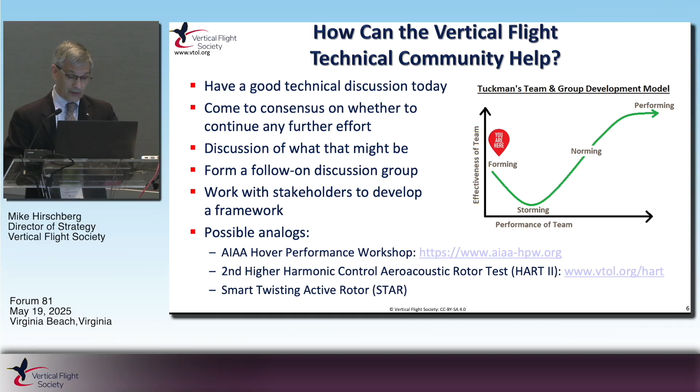So if so, then maybe it's forming a follow-on discussion group, working with stakeholders. I mentioned some of the government agencies. There's some different potential go-bys or analogs. There's a hover prediction workshop with the Army and the High Performance Computing Center. There's HART, STAR. Actually, STAR is having a meeting right now.

And then specifically, I mentioned these web pages, this Downwash landing page, Downwash library. We have a hover community discussion group, right? So we could start one on downwash and outwash if we want to have a discussion on that, and then look at emulating other types of working groups that they've done in the past.

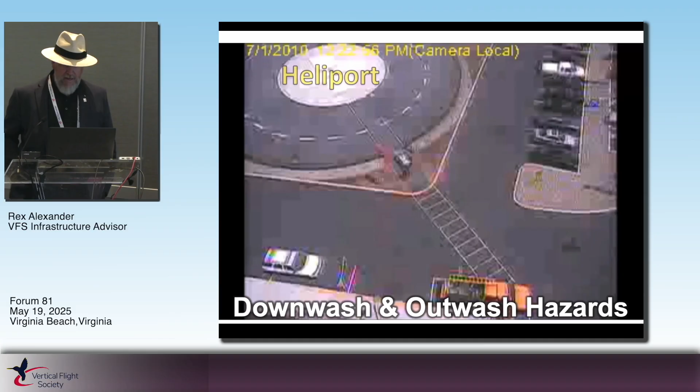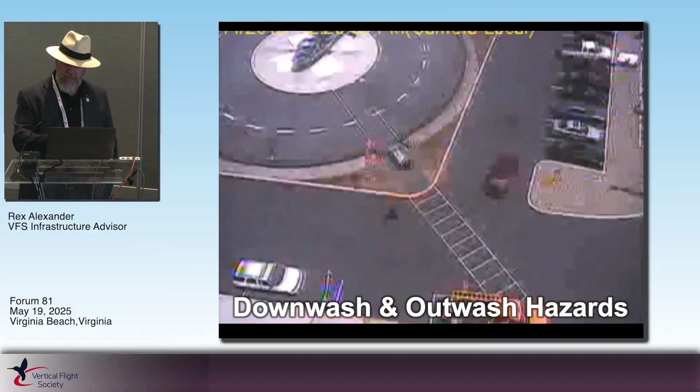I luckily dodged it. Heliport in the middle, up in the right-hand corner, you see the white truck and the people walking by. The tailgate's down with a tonneau cover, downwash, $250,000 later and 9 stitches. And this is just fun to watch. Having been in Army aviation for 6 years and had the opportunity to blow over 3 porta potties myself, only with a Bell 206, I was fairly happy with this.

I think one of the key elements we look at in quantifying downwash and outwash is the fact that the FAA in Engineering Brief 105 Alpha drew a line in the sand for the first time ever and quantified what the caution area is, basing that on 34.5 miles per hour. Now, the problem is I don't have any tools to actually ascertain what each aircraft in the inventory creates during normal operations into and out of a heliport, let alone eVTOLs coming into and out of vertiports. But we now have a number.

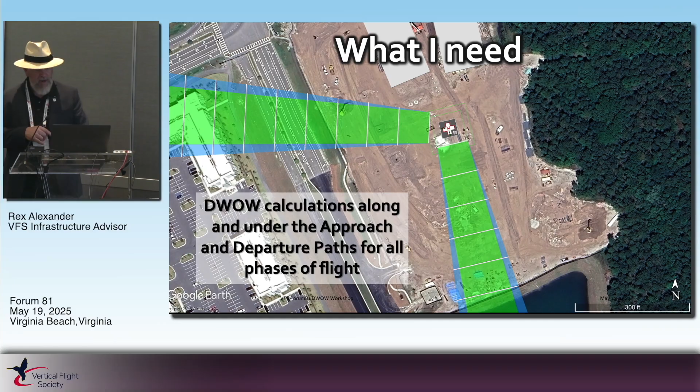I need something that calculates that downwash as it's coming down from the aircraft after it transitions from effective transitional lift below and above. Right now I have a model that's right over the top of the heliport. I need something that I can calculate the flight path. One of the missing ingredients we have in the helicopter world is we don't have a good parameter I can point to that defines what a stabilized approach is for a helicopter.

In the airplane world, there's a lot of material that says this is a stabilized approach. A really good friend of mine from the FAA and I brought this topic up about a year ago. It was amazing how much pushback we got from the helicopter industry when we broached the subject of, hey, we should define what a stabilized approach is. No one wanted to, which I found really interesting.

So based on normal mathematics and physics formulas, I created a spreadsheet where we can pick and choose different aircraft for a stabilized approach. And I can calculate what the average and the peak of the downwash might be at a stabilized hover. Now, the thing is, I can't add the formula that says, okay, the pilot is on approach, he's decelerating, he's adding power, or she's adding power. They're arresting the descent rate, they're adding more power. Well, that's not a stabilized hover.

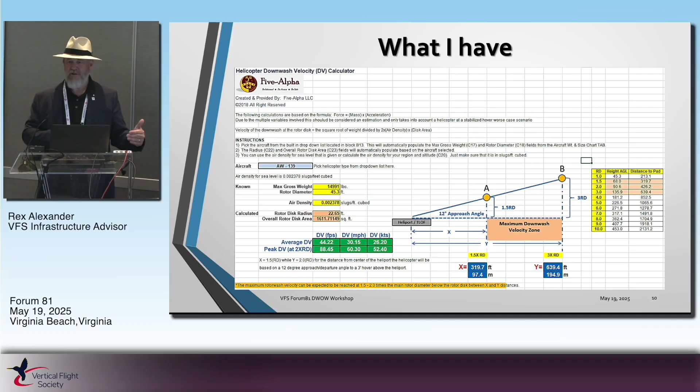That downwash vector and quantity is going to be much higher than a stabilized approach or stabilized hover, whether it's in ground effect or out of ground effect. I don't have the formula to actually figure that out. What I want is what we see in today's research when it comes to noise. We have contour lines that show me where the noise contour is for decibel readings and how those propagate out and decrease. What I want is the exact same thing for downwash.

This is a 34.5 mile an hour ring. Anything inside of that is my caution area. We know it's not perfectly circular at all, especially on that approach and departure path. That's what I want. Now, how do we apply that? I look at the risk analysis piece when we look at downwash and outwash. This is straight out of ICAO's safety management system.

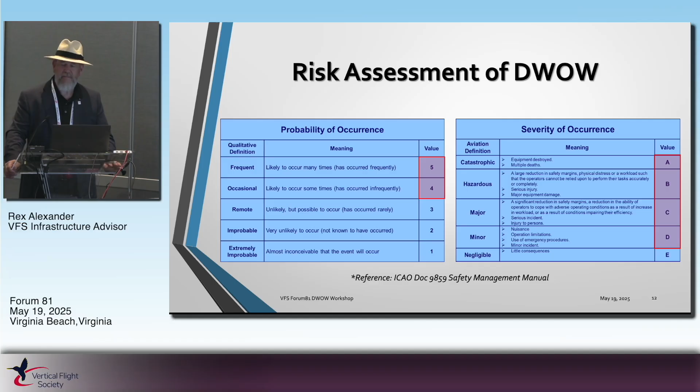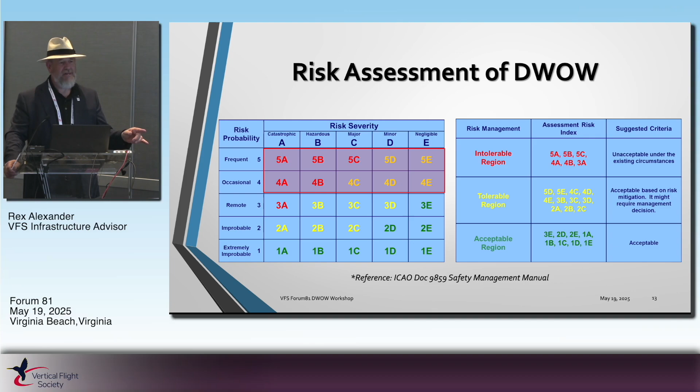Frequent, likely to occur many times, has occurred frequently, yes. Occasional, likely to occur sometimes, has occurred infrequently. Anything we talk about with downwash and outwash is going to be a 5 or a 4. Then we look at the severity side. If you look at 5 and 4, A, B, and C, basically intolerable region, but we allow it to go on constantly. So from a risk analysis standpoint, having data to plug into my safety management system based on the locations of my landing areas and the aircraft that are operating there would be huge on the safety side of the house.

Now, our good friends at the FAA, I've had this conversation, Mike had pointed to it. We're talking about the fact that we have no good data. There is no reporting system on how to report or who to report a downwash or outwash incident to, whether it's injury or damage. Now, as a consultant that works in this space, I will tell you I've been hired several times over the last 30 years to represent individuals in lawsuits. Most of those have been settled out of court, so they're not discoverable by the public. And neither the FAA nor the NTSB has ever received a report from any of them.

So ASIAS may be a good conduit for us to actually effect a reporting system, just like we do for bird strikes today, laser strikes, or drone incursions. Gathering good solid data is going to be huge to be able to actually figure out what the problem is.

Again, lots of variables. We have an opportunity, I think, in talking with Richard Brown and Mike Price several times now, and we had the Downwash online discussion a couple of weeks ago. If you haven't seen that, it is online on YouTube. Please go look at it. I see a lot of opportunities for improvements in this space for us as traditional helicopter operators, but also in the future as eVTOL operators.

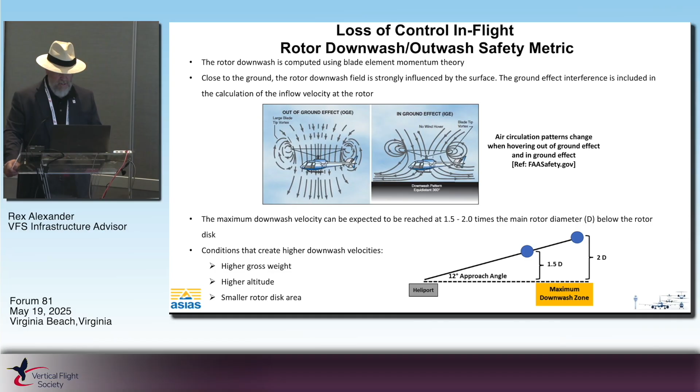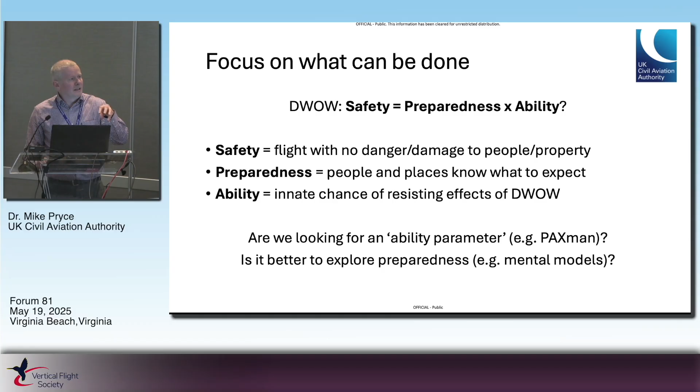But I think one of the things we need to really understand is what's the end point you want to get to. And for the UK CAA, it's very much that third-party safety is the thing that no regulator can turn their back on. So a lot of the focus and discussion is on what the innovators are doing, and we're an enabling regulator. We want to enable those innovators, and it's by bringing everybody to that final endpoint and understanding where does safety really lie and how do we prepare for it, that I think it could be really useful to have a discussion.

Mike Hirschberg's talked about in the past a thing people call the wheel of misfortune for vertical takeoff aircraft, where lots of the programs fail. And for eVTOL, is there a wheel of fortune? Is it the case that now we have the technology that can make these aircraft work? We did some modeling with Richard Brown, a publication called, not very snappy names, I know, CAP 2576. Again, that's available free online.

But one of the products that came out of that was, okay, what markings do you have on the ground? Do you have a classic TLOF FATO helicopter marking? Or if you've got eVTOLs producing outwash spikes, do you have different shapes? My children, if you go to their school sports halls, what you find is they have painted lines for all the different sports they may play in different colours. Is that something we want to have? Do we want a really confusing area to land in? Do we have something that's dynamically generated? Virtual reality, is that how you do it? There's all sorts of possibilities.

But how do we future-proof whatever decisions we make now by understanding what DWOW, as we're calling it, may actually produce in the future, I think is a really important area. We don't want to box ourselves in and limit innovators by coming up with something that works for the Mark 1 version of an aircraft, but not the Mark 5 that comes along in a number of years' time.

Operations, I work in flight operations at the CAA, not the innovation team. And we're looking at this very much from that perspective of, okay, let's imagine these things in daily service. How do we make sure that happens in a safe way? How do you get to the 10 to the -9 or 10 to the -12, whatever number it is that you come up with that you want your sector to aspire to and achieve?

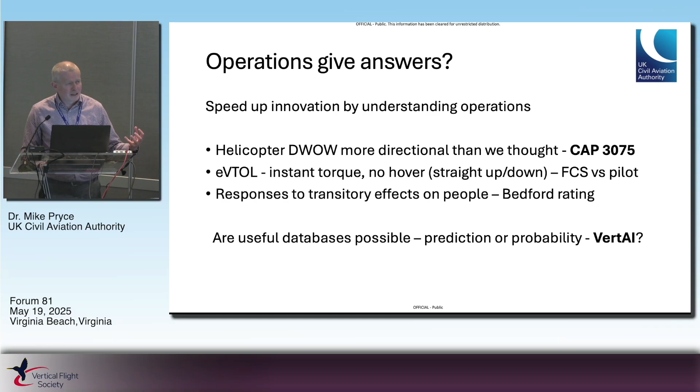But it would be really good to end up with a usable database that can be shared openly, that we know is based on validated data, and actually models also are validated against that data. But if you ask me a simple question, which is, what's the one thing we can do? And this is maybe a dumb idea coming out of my dumb questions: I think perhaps we need to rename downwash and outwash.

Most people I speak to who aren't in aviation, they say, what do you do? And I say this, and they're kind of like, what's that? What are you talking about? In the airliner area, jet blast kind of sounds dangerous. If we want people to be cautious around helicopters and eVTOLs and to watch out for outwash, I mean, outwash sounds like it's something to do with laundry for a lot of people. I think we should come up with a different name. And again, it's one of the things to discuss today.

Here are some suggestions. These just popped out of my head almost randomly. Rotor blast, but is that just a one-off event? Actually, outwash feels like waves hitting you. Maybe vortex waves because it's produced by vortices. Prop gusts. You know, eVTOLs don't usually have rotors; they have propellers. I know this is a subject Mike has written about.

But really, the main thing is, I think the objective of all this is to let people who are around these aircraft or operating these aircraft have some sort of mental model that allows them to deal with the dangers that are presented. So actually those dangers never appear.

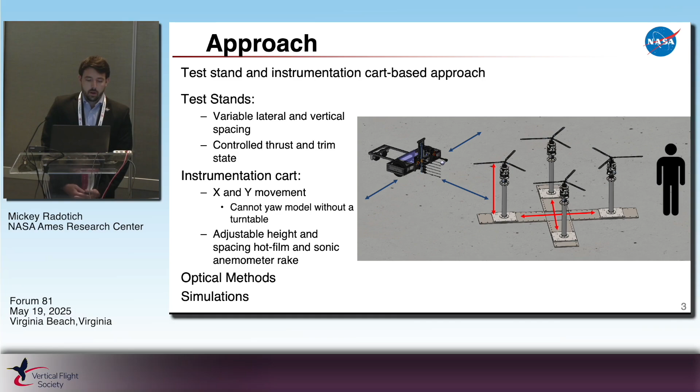So being able to space them longitudinally and laterally and vertically separate from each other to model any different configuration. And then having our instrumentation really able to move and probe anywhere in the radial or azimuthal field of the rotor. We're also looking into some optical methods that I'll talk about in a second, and running some of our own simulations as well.

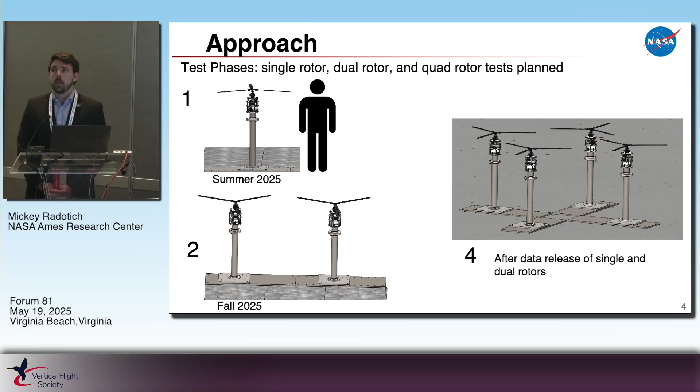So our current testing plan, very soon in this summer, 2025, basically as soon as I get back from here, we'll start testing our single rotor model. And we'll be moving on to a dual rotor, release that data, and then the plan is to move into a 4-rotor configuration. So real quick, just on how we are developing our points of interest here.

We're looking at NASA's RVLT reference vehicles, a family of vehicles that represent different configurations representative of urban air mobility. And so taking the different hub-to-hub distance and Z separation, vertical separation between the rotors, you can see that a lot of things fall into this bounding box of 2 to 3 radii rotor separation and 0 to 0.4, 0.5 radii vertical separation. So that's where we're looking to start.

Now the test stands that we're using here are pretty simple. 5-foot diameter, being able to measure thrust and moment with collective and cyclic control. The big thing about them, though, is that they're height adjustable from 2 feet to 10 feet off the ground. So we can get down to 0.4 diameters off the ground, all the way up to 10 feet. So we can change them individually.

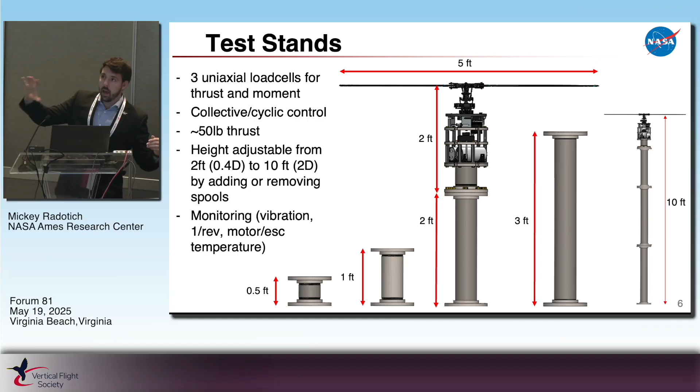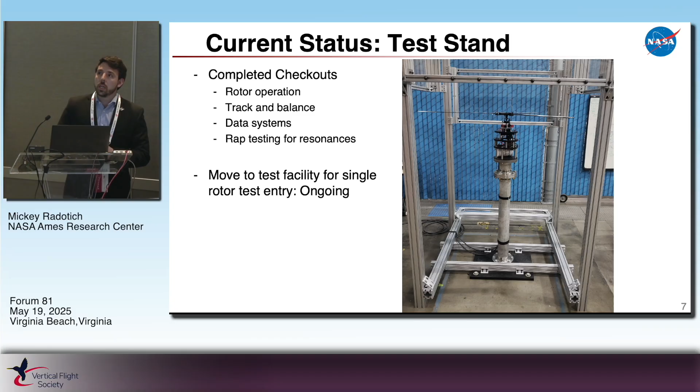So you can look at different rotor heights configuration on the same vehicle, as well as that vehicle at different distances off the ground and how your outwash is changing there. So this test stand exists, and checkouts on operation, track and balance, data system testing, and making sure we don't shake apart due to ground resonance, sorry. And we're moving out to our test facility that I'll show in a second.

So then the other big part of this is the instrumentation. So we have a mobile instrumentation cart, and it has a hot film rake that again can be moved into any point radially or azimuthally around this rotor system. So a big part of that is it's a fully independent system, so it doesn't depend on this specific rotor setup to operate. You could take it and put it next to any other hover test stand or full flying hovering vehicles.

It is completely independent, so it is something that we'd like to use for a variety of different things in the future. And a little bit about what we're doing and why in terms of instrumentation is we're using a rake of hot films. And so the motivation there is that we can get really fine spatial resolution. So we can get down to 1/2 inch off the ground and space those hot films about 3/4 of an inch apart to get kind of a dense field of our measurements. And it can also take very high rate data.

So we talk about outwash being chaotic and very time dependent. And so we're not just looking at averages, we're looking at the frequencies that are coming off of that and that high speed data. So sampling at 10 kilohertz, for example, on these hot films. We also have a sonic anemometer on here. And again, for reference, that's about 5 inches diameter on the sphere, and that's a fairly small sonic anemometer, so you couldn't get that kind of spatial resolution. Also, the sampling rates are typically a lot slower at around 10 hertz.

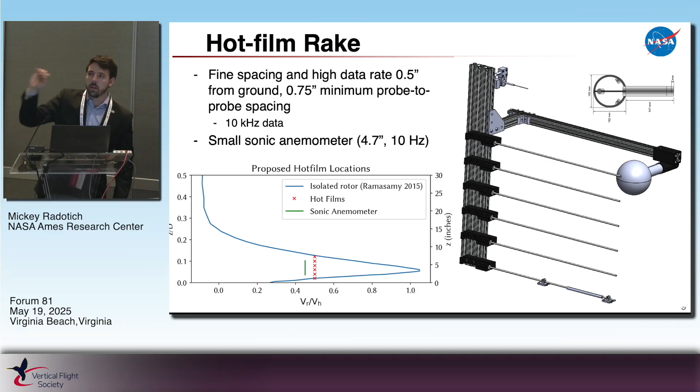That chart there on the bottom left kind of highlights why we are motivated to do that. So if you look at normalized velocities and heights off the ground, you can see that sharp knee bend where that peak velocity is. It can be a pretty small range, and so we want to really capture that distribution there with our hot films.

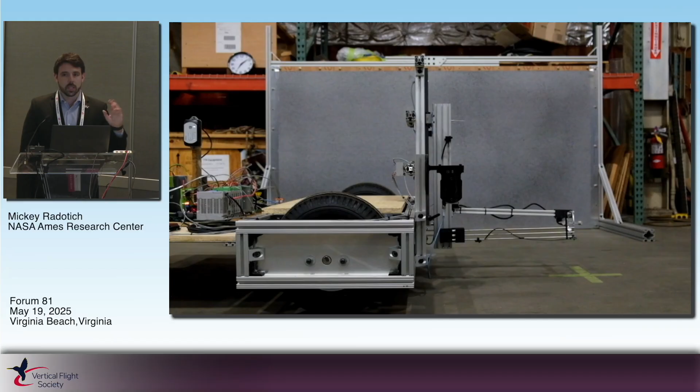So just so that it's real, this is a quick demo we had lying around of this cart operating. So you can actuate the rake vertically and also set the spacing of each hot film relative to each other, drive the cart around, and set the hot films back down where they need to be. So we'll be taking many data points around our rotor systems.

The next thing I want to talk about is an optical method that we have kind of in development with our optical folks over at Ames. And that is helium seeded background oriented Schlieren velocimetry. And so the general idea here, without getting too far into the weeds, is you can inject helium into the flow field, and with Schlieren imaging, you can see the difference in refractive index that's caused by the different density of your gases. And so you can see those structures kind of moving through the flow field, and that's just fan forced flow.

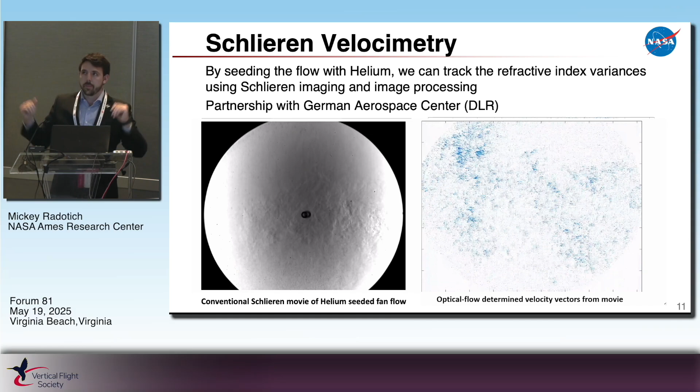And then with a camera with an LED and retroreflective background with a randomized speckle pattern on it, you can capture that difference in refractive index and then correlate that with the background and get your velocities. So again, this is a method that is in development from researchers at Ames and our partners at the DLR in Germany. And so they're developing this new method, and we are hoping to see what kind of good results we can get out of it. We're also doing our own simulations.

So, primarily looking at CFD and comprehensive analysis. So we're using OVERFLOW in fully blade resolved, as well as kind of a new feature in OVERFLOW, an actuator line model that models the rotor as an actuator line and then calculates the rest of the flow field as it normally would. And that is just to save in computation costs. So we're looking at the effectiveness of that.

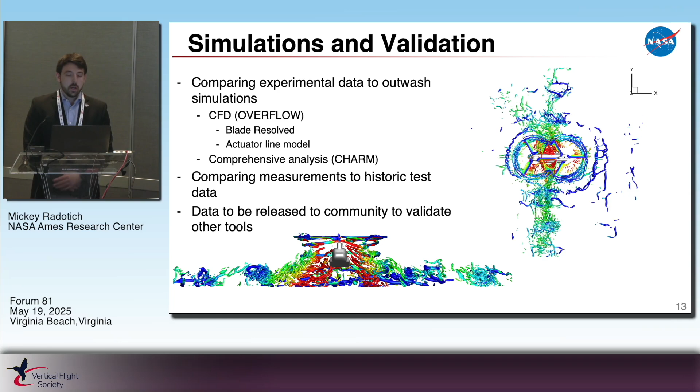And then of course, comprehensive analysis, the even more computationally efficient and fast methods there. So of course, we'll be comparing our measurements, particularly in the single and dual rotor setup, to historic test data. And we'll be releasing all of our data into the community for everybody here to validate your tools.

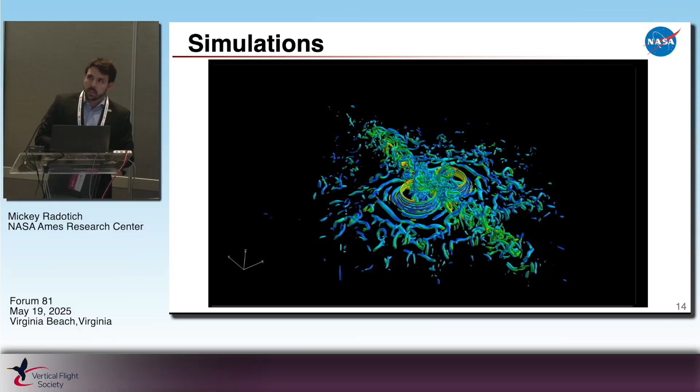Now, I just thought I'd show this up here. Again, this is what we're talking about with those jets that form kind of in the symmetry plane between these rotors. So you get much higher velocities where the outwash here is interacting.

And it's not just a parking lot, right? It has the infrastructure we need to run the test that we need to do. So it's a place that has a rich history of rotor testing, and we are going to continue that.

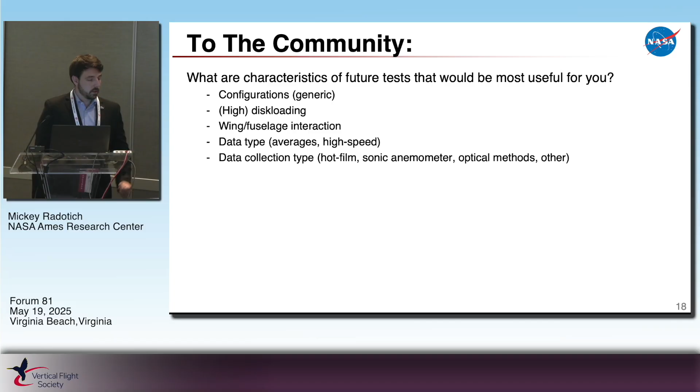So as far as the workshop, I know we don't have questions right now, but in the discussion and talking to me afterwards, we are looking for what the modeling community wants in terms of data and what you want to see from us, to help scope our future tests. So these types of detailed questions, we'll save either for after the presenters or offline.

But yes, I did have one. Sure. Whereas most multirotor configurations use more than two rotors, are you looking at that as well? Not in the current plans, but again, we're generating downwash and outwash, and it should be representative. All right, so now we're going to switch to our modeling and simulation companies.

Thanks, Mike, for having me. I expected a small meeting, so I'm kind of a little bit overwhelmed. You will see it also in my hastily stitched presentation. First of all, Mike, I was thinking the entire time, I tried to come up with a nice word for downwash and outwash in my native language, German, but I couldn't come up with anything less than 30 characters. So maybe English is a better one. So good luck with that. I will not be any help there.

But I followed your lead actually with my presentation, and will actually have more questions than answers in my presentation as well. I will, for the sake of quickness, go through this. We didn't get any guidance of what to show, so I did my best guess. I remembered that I'm actually a mechanic before I became an engineer. So I tried to look at everything a little bit from the practical side. Why are we doing stuff? That kind of thing. So first I would like to say we are ART, we're doing FLIGHTLAB and RCAS. I wanted to show from the toolmaker perspective how we experience the downwash and outwash discussion.

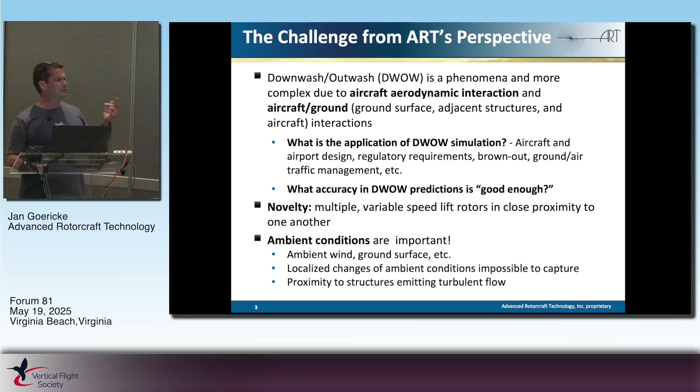And then you will find, of course, very quickly that ambient conditions do matter, right? There was a measurement of ambient wind. It's probably not good enough because you have probably a large area. There's a lot of different wind going on in different corners here. And we saw that in NASA Ames with the structures around it. There's a lot of stuff going on from the ambient that you have to catch as well in order to make sure that your predictions are correct. So just unleashing CFD might not be the one thing that we need to do here.

Just as a background, I thought we were only like 10 people here in the room. If you don't know us, our company has about 40 years experience in modeling and simulation. And as I mentioned, we have done it for helicopters before, and now seeing the new configurations coming around and looking into this again. And one of the other aspects that our tools are used for is to set up measurement systems. I'm old enough to remember that we used to measure first before we unleash CFD. Now we do it the other way around. We measure to make sure that CFD was correct.

And I feel a little bit of the art of measurement is lost. There are people that I could go to that would tell me where to put my sensor, which sensor would work, how to avoid obstructions of sensors. Just because you put it on a boom doesn't mean that you don't back pressure your sensor because of all the structure that's behind it. What is the secret sauce there? So I found out when I supported some of our customers on setting up a test campaign that we can use our tools to set up measurement systems, but it feels a little bit like reinventing the wheel. So to our community here, I would also like to have some good guidelines of how do we measure this consistently for different aircraft configurations as well.

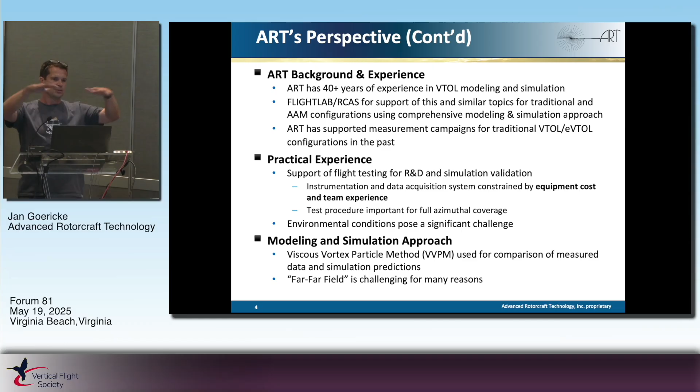And what I found out is that, of course, when I do a viscous vortex particle method, I can put virtual sensors wherever I want in a domain. But then in the real world, you can only afford 5 sensors. Where do you place them? Do you have a horizontal grid? Do you have a vertical rake? Do you have both? Can you afford both? What is the sampling rate? And all this nitty gritty that you have to then do with the time synchronization with your ambient data is really tricky. So a lot of guidance, and I think NASA is exactly on this path. I was really excited to hear that.

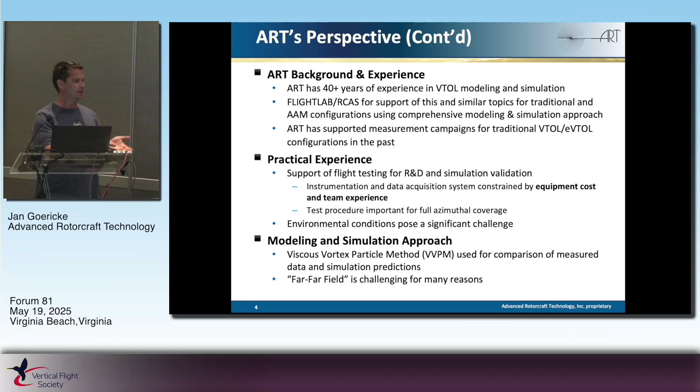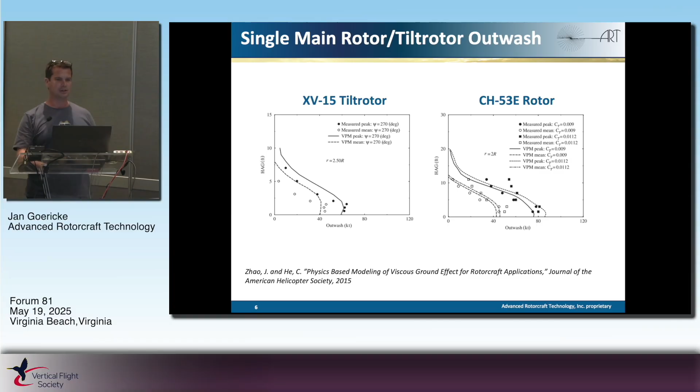And of course, my presentation is different because I don't start with our tool. We are using the same tools that we're using for helicopters to do AAM as well. So we're using the viscous vortex particle method to do a lot of the work that we're doing for downwash/outwash. That's probably not a surprise to anybody. And I will skip those background slides here a little bit. We have done a lot of this work on helicopters before. Everybody has probably studied that in this group.

This was one of the works I was actually involved in, inspired by Dr. Brown when he talked about these blast zones. I actually like this blast zone. It sounds dangerous, and it is dangerous. I stood under a helicopter, and it really changes your mind. And you see these blast zones coming out. So we have tools that predict those zones consistently. So now it's a matter of how far away do we have to predict it, and how accurate do we have to be there? Or can we use these tools that we have right now and change the design?

Is there something in the design space that we can actually do closer to the aircraft as well? And then from the practical point of view, I already mentioned it. I have done a lot of wind tunnel testing in my life, flight testing, all this kind of stuff. It always comes back to me: tolerance, fault stack-up in your instrumentation system. How is the instrumentation system calibrated?

And then time synchronization. And then how do you get the weather station? It stands somewhere very far away from you and doesn't know anything about the events that you trigger. So how do you put it all back together into a data acquisition system? Sounds all boring. I apologize if you're bored to tears, but that is actually where it really happens, right? If you want to have really quality data, you have to have a thorough measurement system. Otherwise, what do you compare your simulation against, and how do you trust it?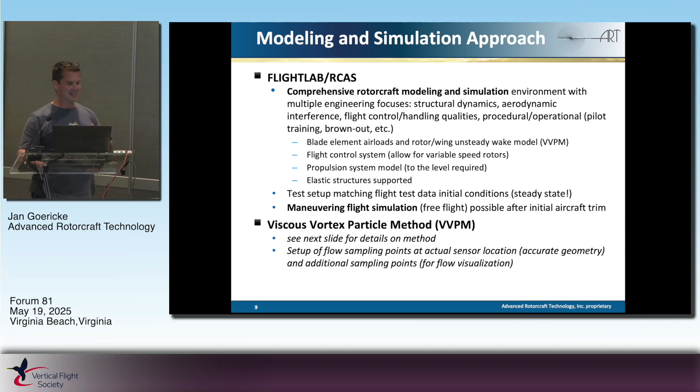And then, as I mentioned, environmental factors, that's actually where I came from. I started with urban air mobility. I was really curious how it feels to fly in the downtown area with a really small aircraft through all the turbulent air and land on top of a roof. I stood on top of a roof. I know it doesn't feel good. I can only imagine how it feels to land there. So that's the next thing that I'm after.

You know our tools. I don't want to bore you with that. With the viscous vortex particle method in particular, we have used it for aircraft design, aircraft operations, and special operations, where we thought we also addressed a far field. Far field for us was like 5 to 9 rotor radii away from the aircraft. What we are now talking about, and we need a better word for that, is far-far field. We are now talking about maybe even 150 meters away from the aircraft. I don't think any of our design tools have been there before. We have other speakers that hopefully have the secret sauce for that.

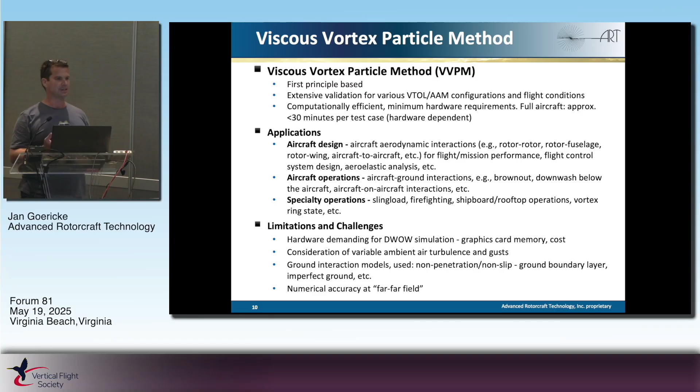So how do we use these tools, or maybe how can we combine these tools? Really interesting, because we want to go really far away to get a really accurate number to make sure that the people in our airfield are safe. So far field is really something that's important. And then we will definitely talk about hardware limitations, modeling and simulation. Especially if you're a CFD person, you know that you talk in weeks, months, this kind of time frame. Probably we need some tools that are faster, that give us answers much faster for more maneuvers, more different ambient conditions, that sort of thing. So as a community, we might want to come together to think about what is good enough. What is the accuracy that's good enough?

And just fast forwarding to my questions here, I think Mike and I got the same memo. I also have just questions. When I got asked to speak here today, I had only questions, and I thought I'd put them out here. We don't have to answer them right now, but again, what is the accuracy that's good enough, and where do we have to have this accuracy? And then maybe we can see it from the other way. Instead of predicting it accurately, maybe we can put out a specification and say 100 meters out there, I can only have that much wind and that much fluctuation. You prove to me that it is correct. That's how it used to be.

But then again, how do we measure it consistently? And what predictive tool can we use to get us there? And then how can we use these predictive tools in practical terms? Practical terms means how can I support an OEM today to help him through his certification? Because that's really what we're after, right? We want to make sure that the aircraft operation is safe so these aircraft can go out.

And I'll wrap up here pretty quickly. I think I overplayed my wind tunnel a little bit, but I'm really curious about this guideline of measurements. So I understand CFD, I understand the ins and outs from viscous vortex particle method. I know that we can only release so many particles, and if you go far, far away, our particles get lazy and just linger around. We still have to compute them. So there's challenges in the hardware there as well. So we have to understand what are the measurement systems that can capture this correctly.

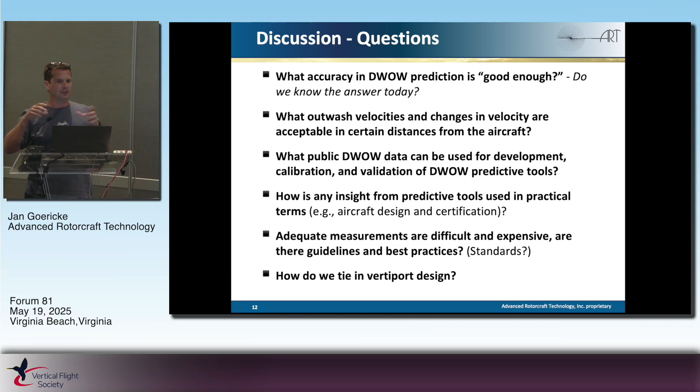And I would like to really embrace Rex with his vertiport design, because it seems like we have to work together. Vertiport design and downwash/outwash have to work together because we have a structure emitting its own wake, working in conjunction with our wake, with the ambient air. There's no clinical situation where you only have an aircraft in a field, perfectly flat ground, nothing else around, and you will be happy. This will never happen.

And so I'm a little bit older, so I asked AI to help me. Everybody says nowadays AI is the solution, right? So I asked, hey, AI, what does it look like? At first I thought it was just silly and I would not show it here today. But this is really what's going on, right? You have a rooftop with all these structures on there, and you have aircraft next to each other taking off and landing. So this is not like a clean outwash.

And then Dr. Brown, I also put the grandma with a kid out there, because you pointed out that it's not always a 6'5" guy who stands there and has to deal with the downwash and outwash. And I found it interesting that AI puts them right on the roof edge, right? So it might be dangerous out there. So yeah, and there's a windsock in the middle.

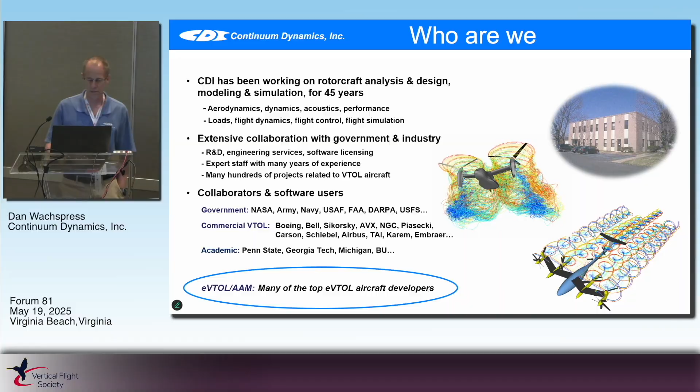So I'm going to just assume everyone knows who CDI is. We've been working in this field for very long. We've got like 150 years of experience right in this room, and that's individually. We have close to 400. No, we've been working in this for a long time, both with the helicopter industry and in the eVTOL industry.

In particular, in terms of downwash and outwash modeling, we have a long effort for the Army where we developed a brownout model. We've worked with the Navy as well. We've got a history of validating our CHARM software for being able to predict the peak strength, the frequency content, the outwash profile. And so in the bottom there, you're seeing an Army brownout flight simulation.

And the interesting thing about what we do is we actually are running this in real time. So we're sacrificing a little bit on fidelity, but we don't have any issues with CPU, any issues with distance away from the aircraft, because our vortex filament model has been developed to allow us to go in real time. And this is actually before GPUs. Now with GPUs, we can do even better.

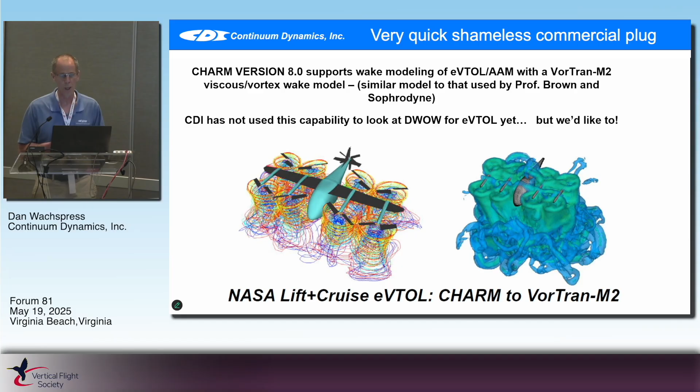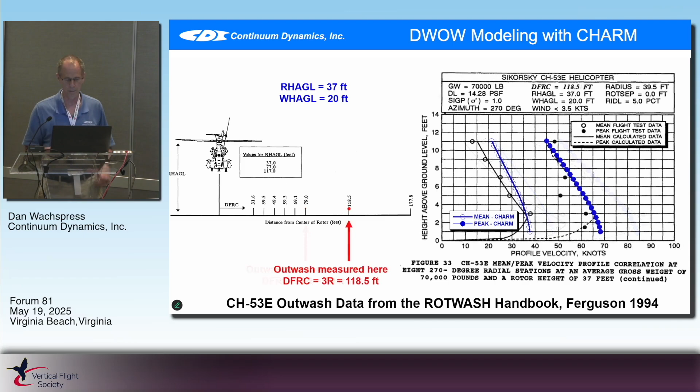So I'm not going to do more of these, but here's at 3R, here's at 2R for the CH-53. And then here's the same wake model, no changes in the wake model, for the V-22. Not a lot of data that you can show on the V-22, even though we have access to it, it's not public, but this is one in the ROTWASH handbook. This data point is in that direction where the peak velocities are, and we can match it.

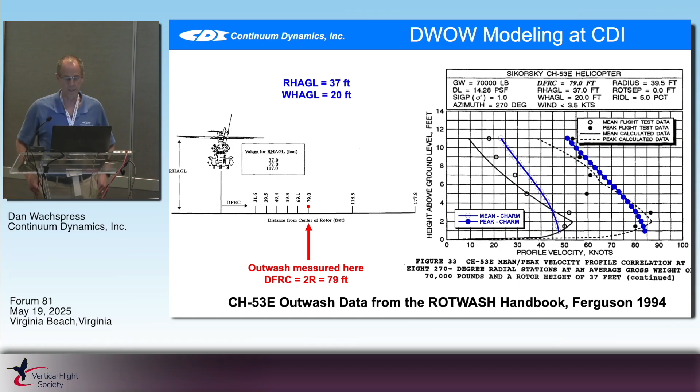There are bad results out there with CHARM. I'm not going to throw anyone under the bus. They even publish their input. There's really bad problems with their input files. And it happens. When you have a code that you license to people, they run it, they publish bad results, and they come back to you and say, why is it bad, when you could have fixed it in 1 minute? So if you get bad results, come back, give me a chance to fix it.

Okay, so this is going to be very interesting to some people because, again, these are my thoughts. And we argue about this at CDI, so I welcome people to argue with me. But this mechanism is primarily inviscid, which is good news. It's very easy to capture this. What you see down at the bottom there, those are 2D inviscid line vortices. And watch, as they come to the ground, you'll see how they bundle up. There's a bundling of vorticity. It has nothing to do with viscosity, nothing to do with turbulence.

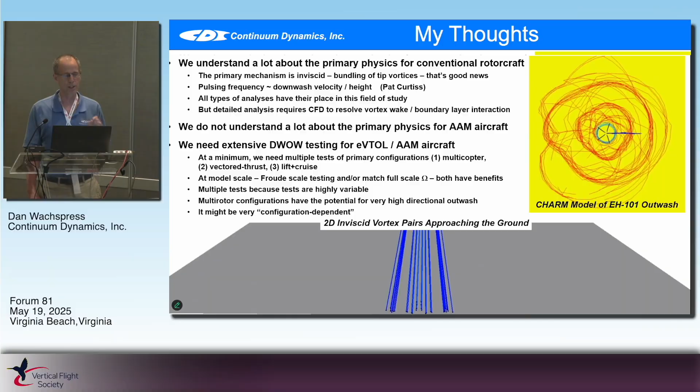So the other thing I'm going to say is I don't think we understand a lot about the primary physics of AAM aircraft yet. And the reason I say that is many times in my career, I thought I understood something, and then you do experiments and you figure out you were wrong. So there's a lot going on. These jets are real. It's not going to just be the simple case of a single main rotor helicopter. There's going to be a lot of viscous interaction between the wakes.

And so we need to test, and we need to test in a lot of different configurations, knowing that it's always going to be different when you do it the next time. So I think we need to test the primary configurations. Very excited that NASA's doing that. Multi-copters, vector thrust, lift plus cruise. We could do model tests with Froude scaling, but we have to do multiple tests, and we have to do a lot of multiple configurations.

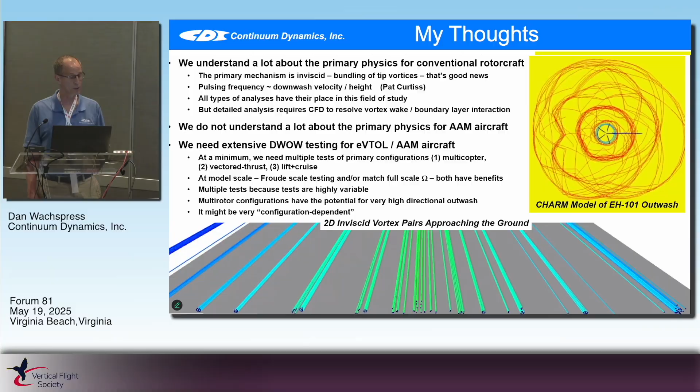Our modeling approach in my group, as some of you know, is the Lattice-Boltzmann method. We have found it to be a very interesting method for quick turnaround, especially if it's GPU based, which we have done over the years. We've ported it on GPUs. We can do up to real time. Some of the things that I show are real time, others are not. But this is really only the work that me and my students have been doing over the years. Also some experimental results that I'll be showing.

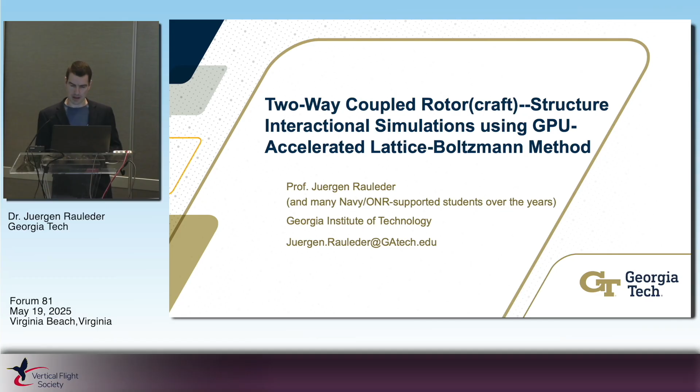Ship deck landing. I think a ship deck landing, well, Dan showed one, I think. So that's one of these scenarios where you have rotors interacting with the ground, with wall structures. You have an interactive wake, or a wake interacting with you, in this case from a ship. But you can have a ground structure next to you, like the hospital that was shown, or else where you have the exact same phenomena, just with winds blowing over solid structures instead of a moving ship that is going into the wind. But it's similar but different. So that's what I'm gonna start with here.

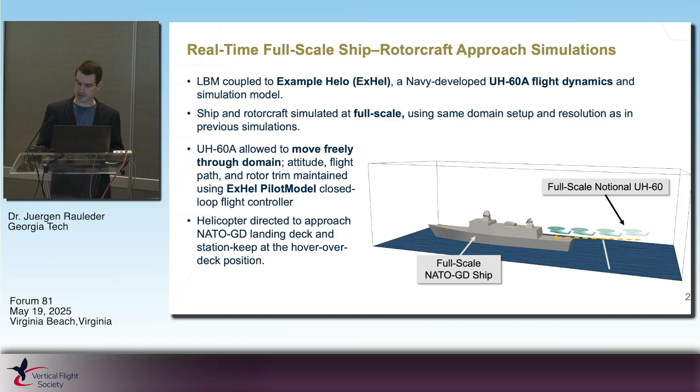What we have simulated in this case was a ship deck landing scenario. You see some of these phenomena that we are really after in downwash and outwash modeling, the interactions with the solid structures, right? And external winds or wakes. And a ship deck landing is a prime example where all of these things are coming together.

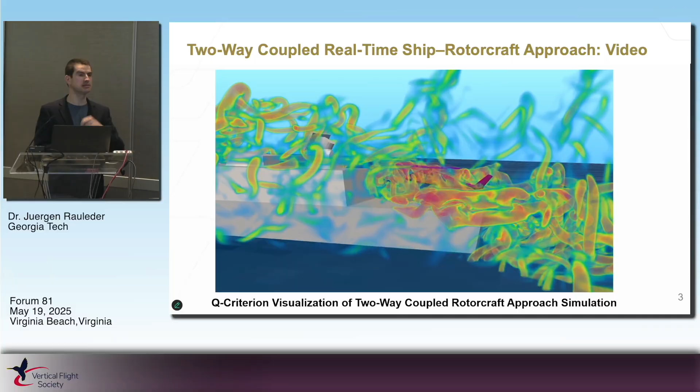You see here a Q criterion visualized. Now, shortly you will see some vector visualizations. Those were produced by Shreyas Ashok. He's sitting over there, one of my students graduating now. So you see these recirculations here, if you see my cursor, recirculation from the hangar door.

You get it onto some parts of your rotor disc, but not others. So a pitching moment will be induced that the pilot needs to react to. You have a ground effect. It's all moving. So you have basically a partial ground effect or dynamic ground effect, because you're changing your height to the ship deck in this case.

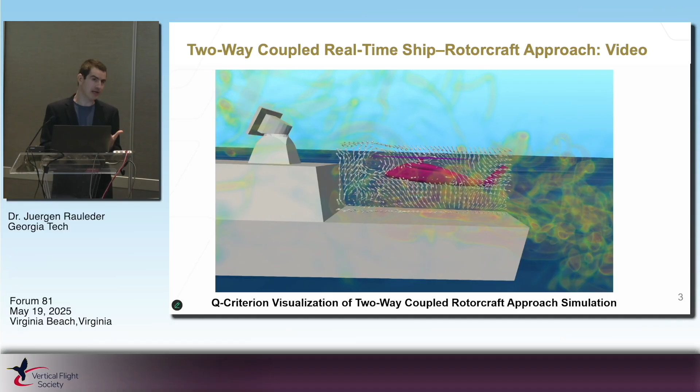So you want to model this accurately, yeah, maybe, but it depends on the use case. If this is for pilot training and you need real time, maybe you don't need all of the little vortex structures. You may be okay. That's what we do here. You're okay with the larger scale structures, the tip vortices, the vortex structures from the ship, and you're not modeling those at the expense. Well, at the payoff of fast turnaround simulations or up to real time.

So in this case, we have published those in the Journal of the American Helicopter Society. I think it was in February, March or so, where we showed all of those things, partial ground effect, time varying, recirculation. We haven't put this in the simulator yet. That's going to happen later this year or next year with NAVAIR at Pax River.

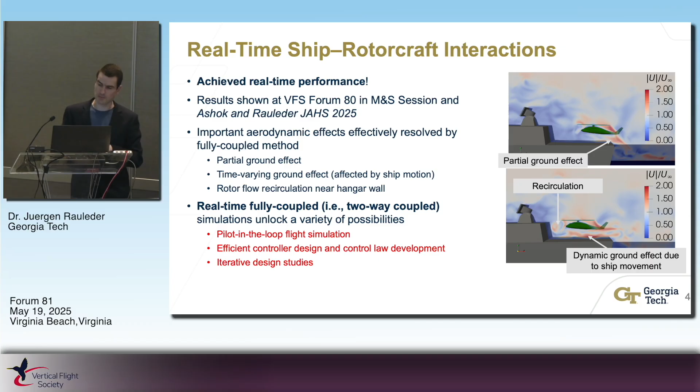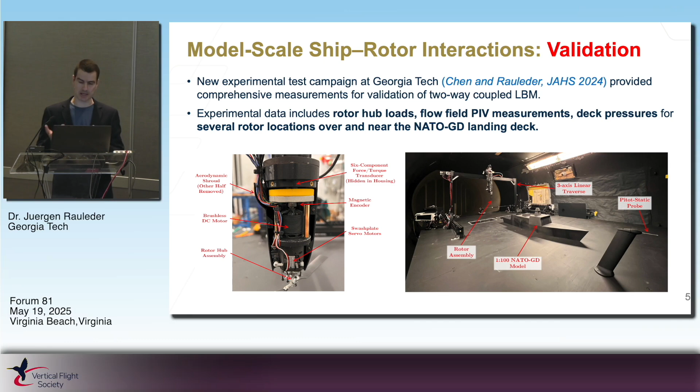But we have done a validation. It was brought up before here in this group, I think it was Jan, talks about experiments. Now you can model a lot, but how do you know that you're right? You need a subscale experiment or a flight test or a wind tunnel test or a mix of all of those. In this case, we went to a subscale wind tunnel test. I'm not going to go into detail of that, but you can look at those results.

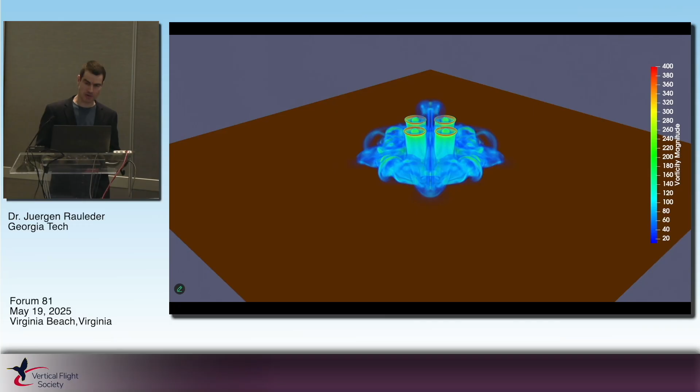Then multi-rotors, the next little topic that I want to talk about. They interact with each other. That's also a lattice Boltzmann simulation, not real time in this case. I'm going to show a little bit more about the numerics later, but here I want to point out this unsteadiness that also Richard Brown in his report in the UK was pointing out. It doesn't look like a mean flow. It's not this very nice uniform flow. Dan pointed out there are peaks.

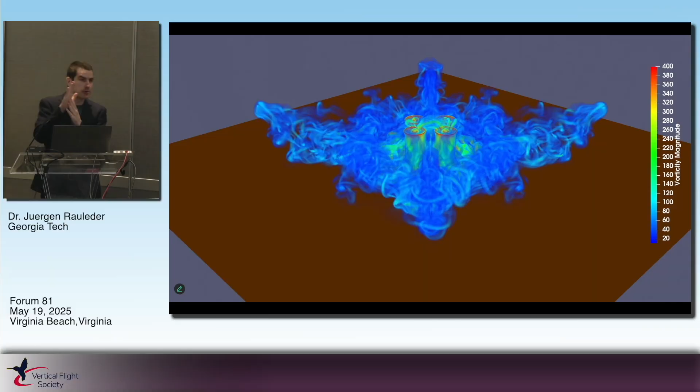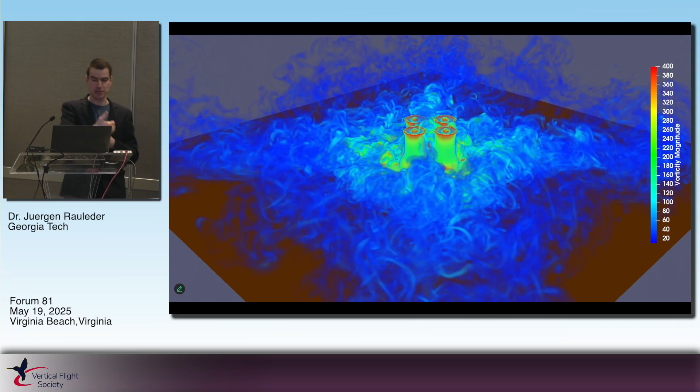So if you're operating there as ground personnel or so, you can't lean constantly into the flow and you're safe. No, it's a constant back and forth. Myself, having boarded a V-22 four times, I can tell you that it's a constant leaning into the flow, going back, leaning into the flow, going back, because you get these peaks, then you don't get them, you fall back, you fall forward. So that's what you see here.

If you abstract a little bit and be a little bit creative, you see all these worms. Sometimes you have constructive interference, destructive interference. You've probably seen a number of papers. That's all real stuff. And you want to simulate that to large wake ages, so a large domain. And the lattice Boltzmann method is nice in the sense that it's very, very little dissipative. And a paper will come out very soon, looking at the students in the right corner over there, that will show how little dissipative it is compared to Navier-Stokes approaches, for example.

So I'm not saying the method is better in every aspect. It's good for certain things, and we found it to be good in quick turnaround, not getting all the little vortices, but the main parts that you're interested in for this problem, I would argue. And it's little dissipative, so you can actually track the vortices in the flow to very old wake ages.

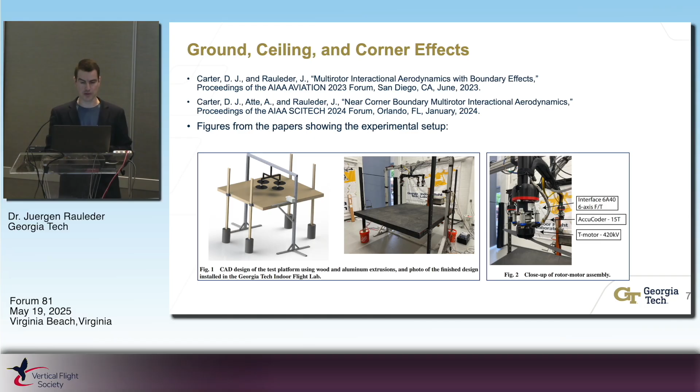We have simulated this setup here again for validation. We have published this in 2023 and 24. Journal papers are on the way. The setup is a little bit bigger than here. This was the first iteration of the rig. The second iteration is a little bit bigger. We're bringing the ground plane up towards the rotors, not the other way around, because the load cells are very sensitive. So you don't want to really move them if you don't have to. And so we're doing the validation with our own experiments.

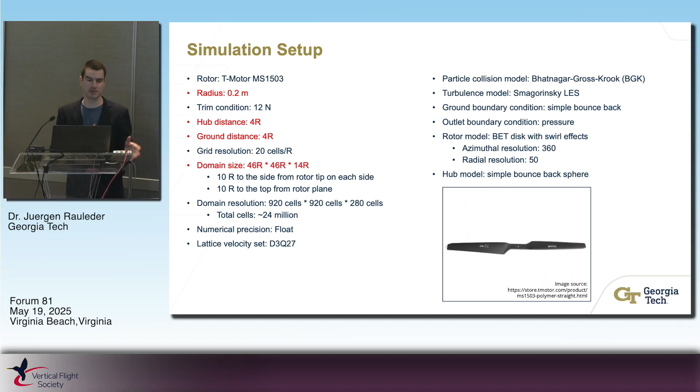And the simulations, back to them. I promised I will talk a little bit more about them. I think we're behind time, so I'll try to speed up here. The domain in this case that you have seen was 46 by 46 by 14 rotor radii, so 14 high, 46 by 46, 24 million cells, small rotor, because we're actually simulating exactly what we did experimentally.

Now, actually, the Lattice-Boltzmann method is special in the sense that your time step is always linked to your grid resolution. And so if you're simulating smaller scale structures or smaller scale geometries, the time step will be very, very small. And so you run a lot of time steps, like this suggests, for even a 10-second interval. And so a larger problem actually helps you in this case.

So if we don't simulate a 0.2 meter rotor, but a 2 meter rotor, we're actually 10 times faster because we have 10 times larger geometry. And so then with a 2 meter rotor that you see on some current prototypes out there, you would do this in 2 minutes per second of real simulated time.

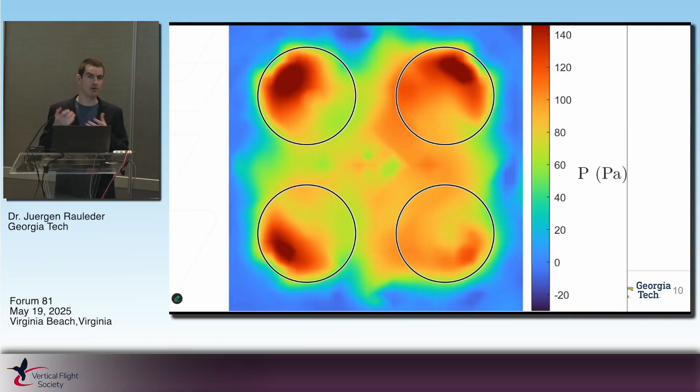And then again, and that's my last 2 slides, we want to validate those things. This is a pressure contour plot of differential pressure. You see sometimes in the middle, negative pressure coming up, fountain effect, because fountain effect was written about for the V22, for some other rotorcraft as well. So sometimes it's coming up whenever it's dark blue.

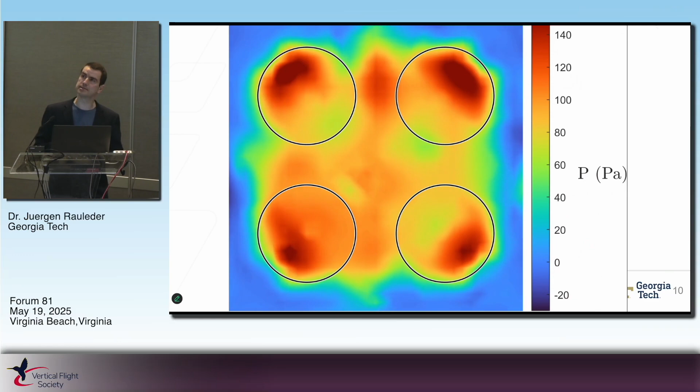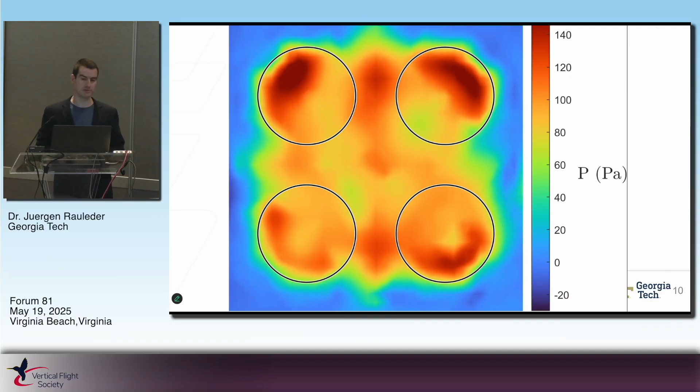But the point here is that it's all very unsteady. So it's not really doing it justice to talk of rotorcraft downwash or outwash simulations or experiments if you're only looking at the mean. That's not what we're after. That's not what is dangerous. It's really the peaks and the unsteadiness.

And the last slide is showing a particle image velocimetry result, also video, which is in this plane of this quad rotor. And this, Mike, is really my last slide with the contact information if you want to reach out. So this is a little bit choppy video, but again, it brings across the unsteadiness. You have the recirculation. Yes, if there was a fuselage body in the middle, then this looks different. So we didn't look at this.

But you can see the vortex structures wobbling right, left, up, down. So it's really an unsteady problem. And that is difficult to catch for many of the methods, especially the lower fidelity ones. And that's what I'm finishing with.

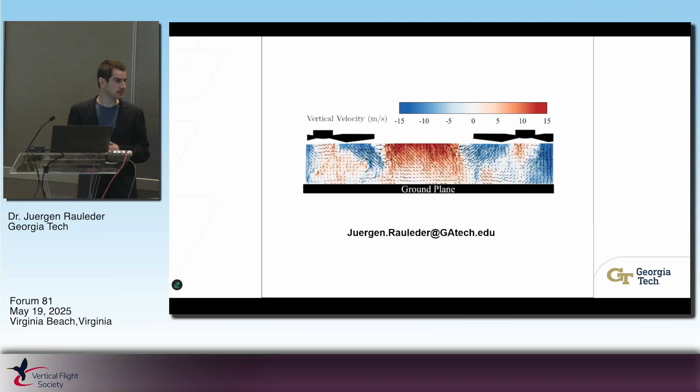The one thing is that a lot of folk have already discussed a lot of the things I was going to discuss, but perhaps I can take a slightly broader position and give a little bit of an overview of some of the issues that I feel are important. And what I want to do is be slightly provocative. I've titled my presentation "Looking Under the Lamppost."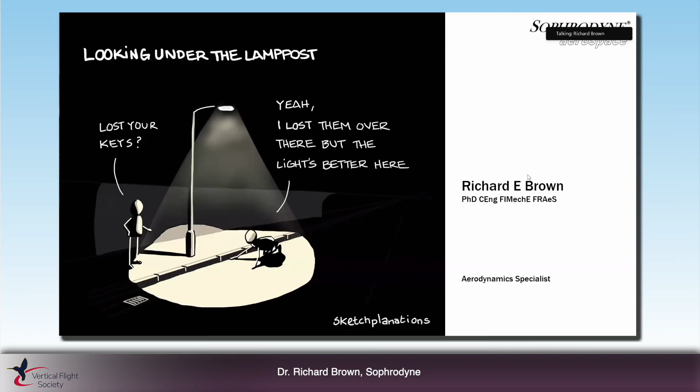We all know the joke. The guy who loses his keys and ends up looking under the lamppost because that's the only place he can actually see. Now, my contention is essentially to ask the question, are we merely solving the problems that we can solve, or are we solving the problem that we should be solving? And this is a personal perspective. See if you agree with me or not. And I'll try and cover this in 10 minutes so that we can have a little bit of time for discussion afterwards.

So the thing that we really need to realize, and we've seen a lot of great work presented this afternoon, is that our models and simulations are merely a way of encapsulating and communicating our understanding of the physical world to other people. If you like, it's a conversation between theory and reality. And I certainly see it as not just another way of generating data. And that's one of the traps that we need to avoid.

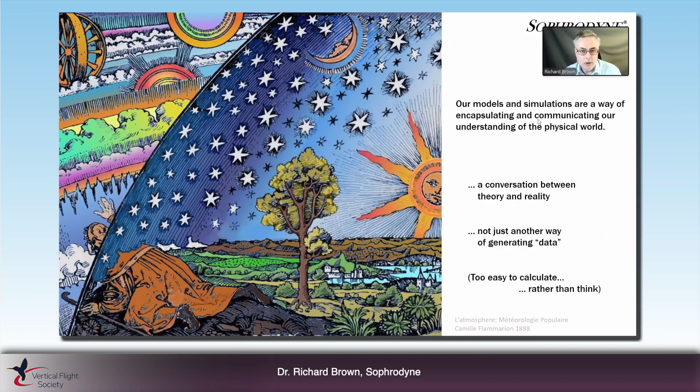It's all too easy to calculate rather than to think. And we need to try to escape from that particular trap when we continue as a community to try to understand the issues that we face. Now, the rotorcraft community, and especially the safety community, relies very heavily on a very simple and appealing model for the outwash.

And I'm very glad to see folk like Sam and Mark in the audience today, because this is their great work that they did, admittedly a while ago, but it's a very influential formalism that has permeated the safety culture and has permeated the understanding of operators, of pilots and so on, as to how the downwash spreads out across the ground. And it's seen as this inverted bell shape where the flow just spreads out uniformly across the ground.

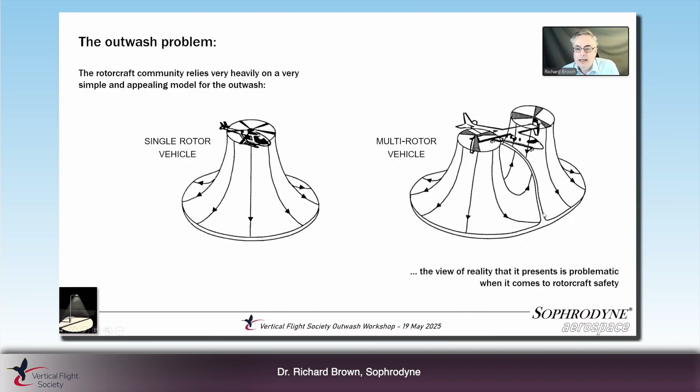In the case where you've perhaps got multi-rotors, then we might have these dividing surfaces, what Mike earlier called stagnation planes, and that might make things a little bit more complicated. The problem is when we look at this view of reality, its theoretical basis is such that it's somewhat problematic when it comes to rotorcraft safety. Now, why that is so is that the model is formulated in terms of an average jet-like flow.

So we can find the mean in terms of these jet-like flows, and if we want to find the maxima, we essentially use that same formalism, but we stretch out the same formalism using the appropriate juxtaposition of constants to end up with a slightly different curve than before. And we need to try and figure out whether there's justification, in fact, for using that particular approach to quantify the safety of vehicles in practice.

Now, this is true of all theoretical concepts. As long as our mindset is framed in terms of one conceptualization of the problem, that's how we'll frame our calculations. That's how we'll construct our measurement campaigns. That's what we will measure and compute. And in the end, that's how we will frame the safety problem. So we'd better be sure that we're right.

So does our boundary layer type flow or our outwash jet-like flow translate properly into physiological effect, translate properly into how we set up the arrays on the ground to actually measure what that outwash flow looks like, and then eventually into specifications for the purposes of defining vertiports and the like, as the FAA have proposed to do with rather simplistic measures of what the effect of outwash on the surroundings might be.

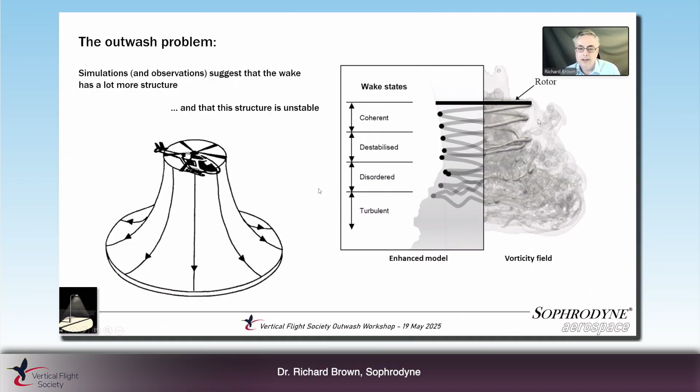Now, here's the really interesting thing. If we look at this particular diagram here, what I've shown is this descent, if you like, in two different senses of the word, from a coherent form of the wake down through increasing disorder to turbulence in the far field of the system. And that's for a rotor in free flow.

If I put the ground in the way, then a simplistic view of how the wake interacts with the ground is essentially to place the ground at some point within this descent through disorder into turbulence. So if I have a high hover height, then that ground interaction might be turbulent. But as I reduce the height, that ground interaction becomes more and more structured.

And Dan talked about Pat Curtis's velocity divided through by height representation of the frequency of these structures that are formed out across the ground. And this is the reason why there is that particular relationship. You end up with this coagulation of vortices, the structure of which is determined by how high the rotor is actually above the ground. Now, the summary is that depending on the extent to which this instability has progressed, the structure of outwash across the ground can be very different.

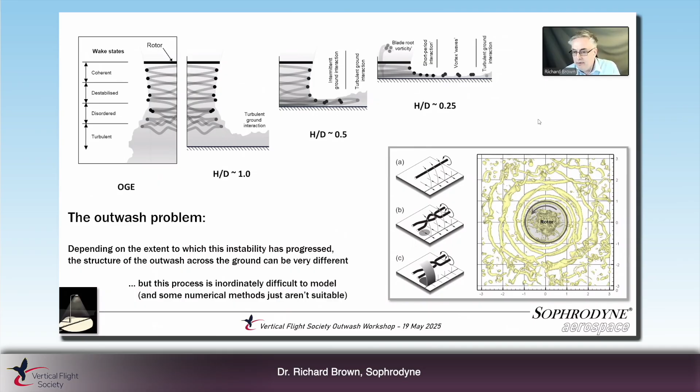Yet the instability process is inordinately difficult to model. I think in true honesty, we can say that no code out there properly captures the progression of these instabilities below the rotor system in perfect detail. The problem is that the characteristics of the numerical process interfere with the physics to give you some analog to what's actually going on. And as it turns out, some numerical methods just aren't suitable to conduct that particular type of analysis out to any significant distances below the rotor.

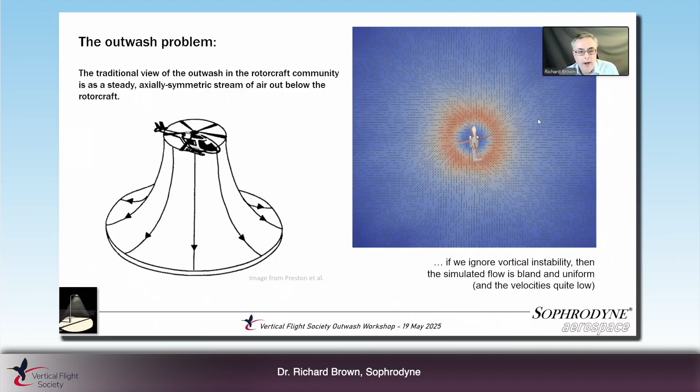And similarly, the maximal velocities are a very dangerous characteristic of the outwash to actually try to encapsulate, because how do we actually know whether this is a persistent feature of the flow or whether it's a one-off, it's a black swan, and that's something that we really need to account for. So when we measure these velocities and translate them into our statistical variation, we need to be very careful of what we're doing. And I don't think the science has actually caught up with the reality there as far as the kinds of techniques that we actually need to implement.

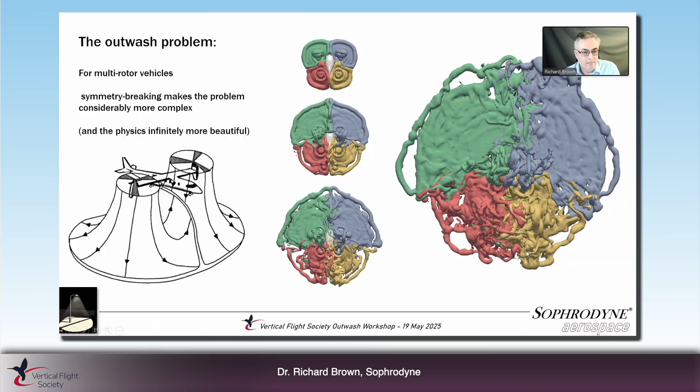So when we end up with a flow that's rather more developed, then you can see that hidden in amongst all this mess and chaos are elements of order. There are jets going out to the side here, a jet going out to the front, a highly turbulent wake, in this case behind the vehicle, because the rear rotors are slightly higher than the forward, and a somewhat sheet-like structure in front. So that's the sort of thing we should be looking for, and we need to set up the experiments in the proper way.

Now, let's have a look at what happens when we try to simulate these systems. How far out from the system do we actually need to simulate the wakes? And this is of huge relevance to the different types of numerical techniques which might be appropriate. If I run this out to 30 rotor revolutions, you can see the symmetry breaking taking place there. And what I'm doing is I'm plotting vorticity just above the surface of the ground. But you can see the flow has hardly gone anywhere by the time that 30 rotor revolutions have taken place. That's far too short a simulation to pick up any particular detail from the flow.

So the kinds of simulations we need to do are much longer. This is a simulation which runs up to something like 400 rotor revolutions. And you can see that the flow just keeps on going. There's very little dissipation, especially in these jet-like structures which tend to emerge between the rotors, and they can propagate out for tremendous distances away from the system. Okay, so we need to resolve the vortical structures within the flow. We need to resolve the instability mechanisms and represent those accurately, and we need to leave the flow alone, give it time to develop before we even start to sample it and to gain statistical information from that simulation.

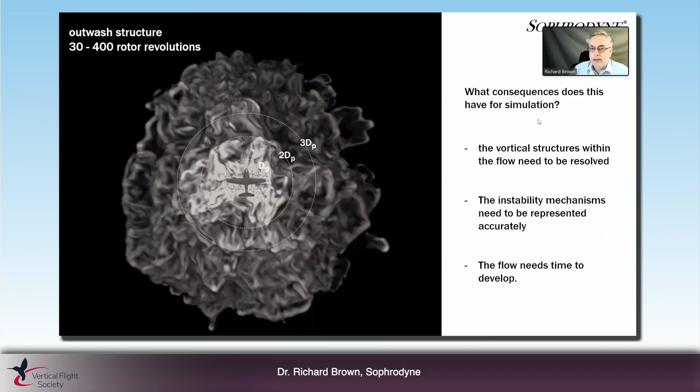Now, what does this mean if we try to abstract our simulations through into the real world in terms of what we might do in terms of observations? Well, let's superimpose the velocity variations on top of a very simple grid, the kind of grid that the FAA was using in the initial series of tests on aircraft like the Joby S4.

Now, you can see that the complexity of the flow field poses extreme constraints on the spatial density of the sensors that are required and the frequency bandwidth which we need to measure the data. That's one thing. That seems to be fairly obvious to me. In this case, you can see that this density of sensors doesn't actually resolve many of the details of the flow with any particular accuracy.

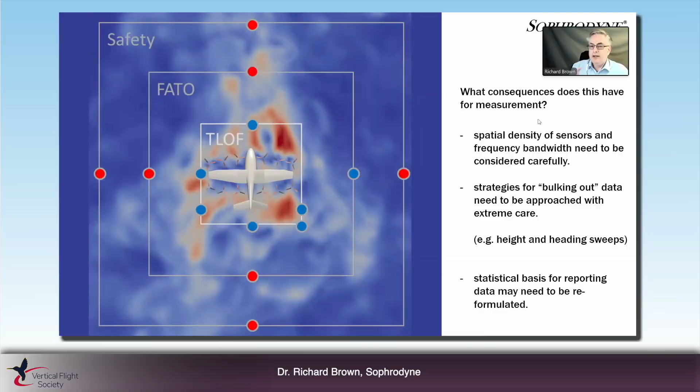So what do we do? As Jan said, we perhaps only have 15 sensors available to us, so can we use those effectively? Well, the question is, do we know what effective actually is? How do we bulk out the data using the very few sensors that we actually have available to us? And I would suggest that the strategies for bulking out data need to be approached with extreme care.

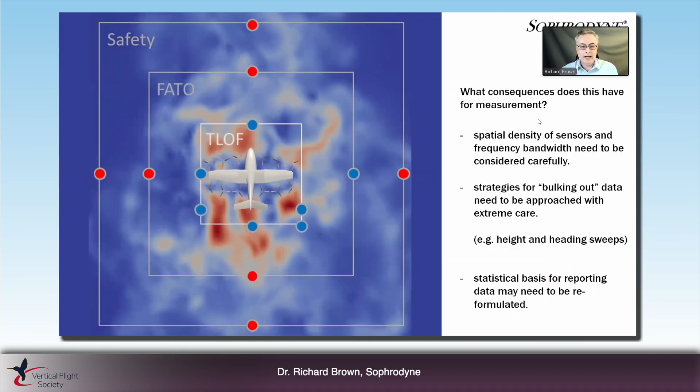For example, this idea of setting the aircraft at a certain height and changing the azimuth of the aircraft and measuring again needs to be looked at in a lot of detail, given the time that it takes for the outwash to propagate. The overturning time, the replacement time of the flow in the outwash, is measured in many seconds. It's not an instantaneous kind of thing.

So we need to be careful to retain the statistical significance of our data when we use very few sensors and perhaps when we use techniques for bulking that out. And I've suggested earlier that the statistical basis for reporting the data may need to be reformulated in a proper investigation.

Now, this gets to the crux of it. Okay, there's my granny picture that Jan was referring to. Essentially, the way that we currently encapsulate the physiological and psychological responses is misleading if we adopt an overly simplistic representation of the outwash field. And this is where things reach a crux, because this is really what we're trying to do when we're trying to solve the safety problem.

We're trying to figure out what the influence of the outwash happens to be on the people who are immersed in that outwash. And if we're taking a historical approach where we look at a simple overturning moment on a burly US Marine, then the basic question is, how apposite is that when we start to look at highly transitory flows, perhaps aligned along certain axes, and where we have people who perhaps do not have the full faculties or the physical strength of the US Marines.

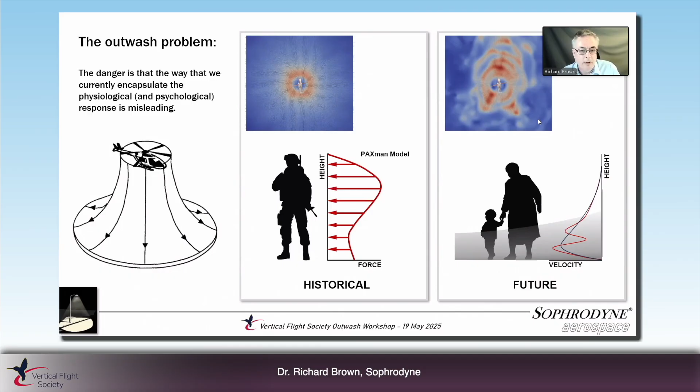As Mike Price was saying, perhaps the physiological and psychological responses need to be separated out into a preparedness and an adequacy of physical... how adequate the person's physical tone is to respond.

Okay, and the last thing, the real crux is that this is certainly not an academic issue. It's not something we can sit around the table and discuss nice numerical methods and sort of inch towards a solution. It's a real problem with practical consequences for the AAM industry. It influences the design, layout, and positioning of vertiports, effective operational procedures during approach, landing, and takeoff, as Rex was saying, and the ability of certain aircraft even to operate from specific sites unless properly designed to do so. So it's an issue of interest to designers, operators, and regulators alike.

And so, in summary, we need to do what is necessary to solve the safety problem. We need to understand the physics before we try to model, and we need to know the physics before we go ahead and gather data. We need to know what we're looking for before we even step out into the field to gather random data. And good numerics can help us ask the right questions. And I think that's the real synergy here.

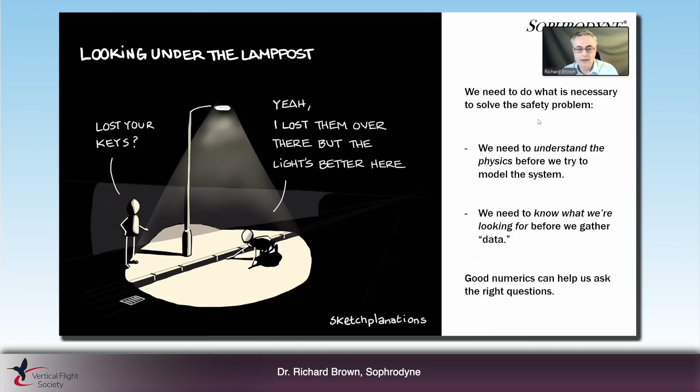Exactly as Dan was saying, we need to get together with the right people, get them in the room, get the numericists together with the experimentalists, thrash out the procedures, and go ahead and do this in a properly structured, interactive, and collegiate way. So modeling outwash correctly is one of the trickiest problems in rotorcraft aerodynamics.

That's par for the course. That's something we know. What I contend is we may need to leave behind some of our cherished assumptions and methodologies to actually solve this thorny problem. And this indeed may involve venturing a little further out into the unknown than we might find comfortable. But certainly the dark out there is not a scarier place if you have the right companions, and I think we're heading in that direction.